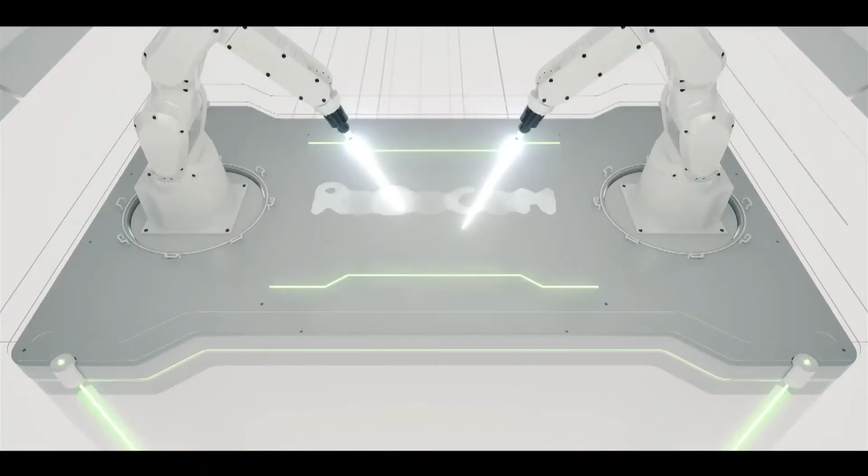Things can amuse and fascinate us all, but it is engineering that changes the world. The engineer has been and is a maker of history.

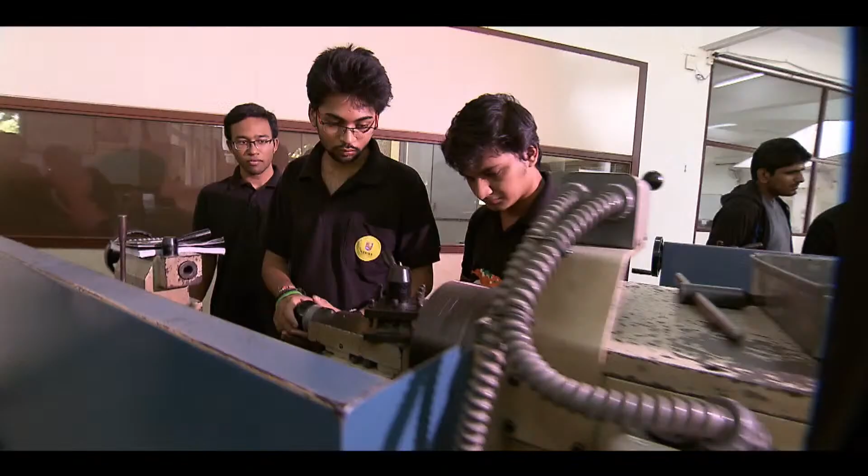One of the most diverse and versatile engineering fields, mechanical engineering is the study of objects and systems in motion. As such, the field touches virtually every aspect of modern life, including robots, that is any automatically operated machine that replaces human effort.

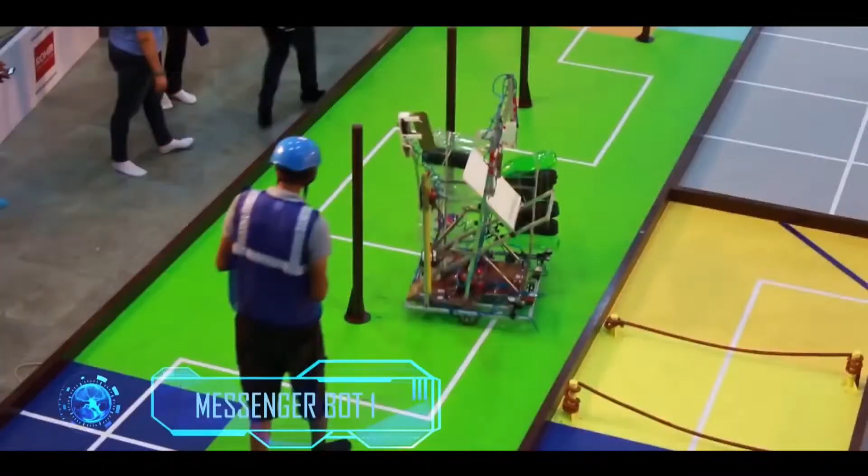Every robot that has been a part of Robocon since 2002 till date, or otherwise, is a programmable mechanical device that can perform tasks and interact with its environment.

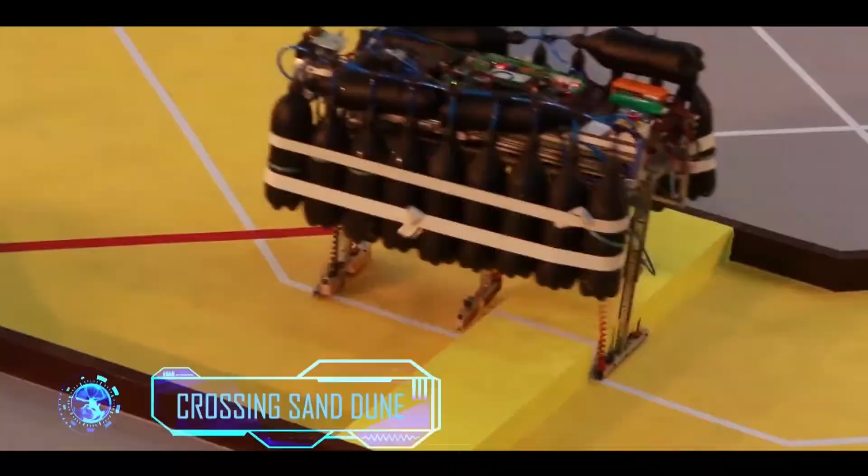This year we have planned a special program for Indian participants to encourage new graduates and students to participate in this robotics challenge, where we have done several things. We started with a curtain raiser program, then we have several interaction programs with participants across India, and we expect the best goes to the finals.

Many students go there and support the team, not only in the arena, but for their fabrication and design. Notice that it's a mix of several disciplines: mechanical engineering, electrical, civil engineering in some cases. Once they see in the hostel the students gathering together and making, students from sciences and mathematics also joined the teams which were playing.

And later on they went on to set up their own startups. So there's a lot of enthusiasm about Robocon, and I am sure it will persist and continue to grow.

DD Robocon is back with a bang. It is a combo of enthusiasm, excitement and the challenge of completing a robotic task with the timer on. The theme of this friendly competition changes every year, keeping intact the concept of creation.

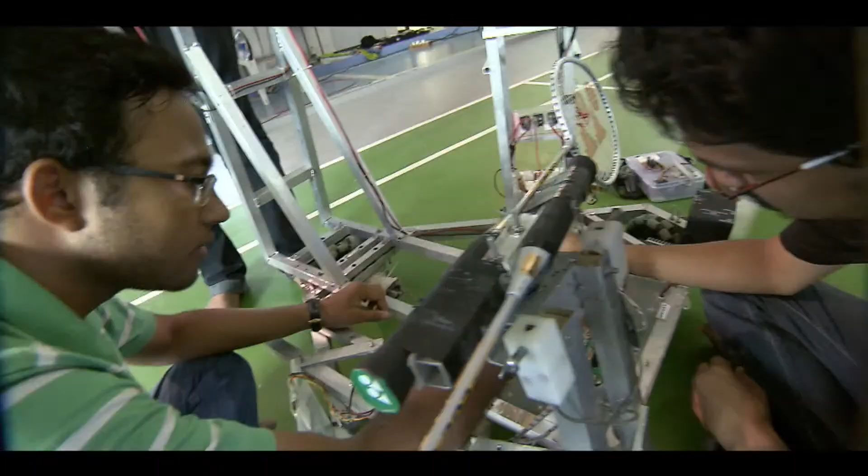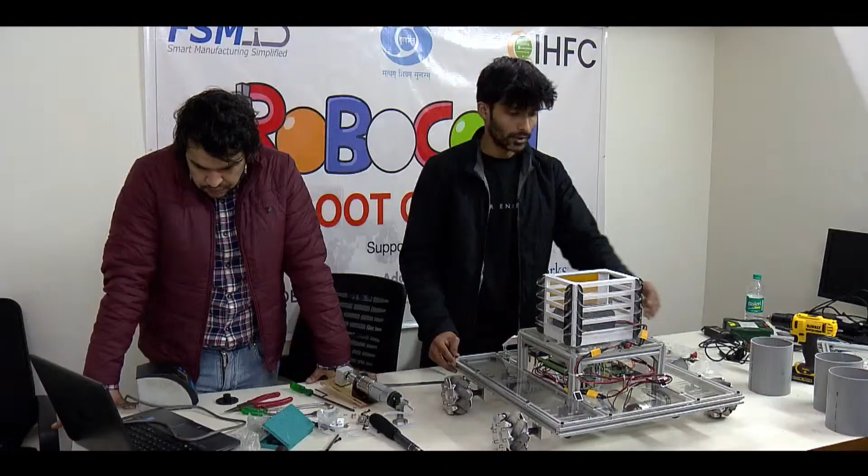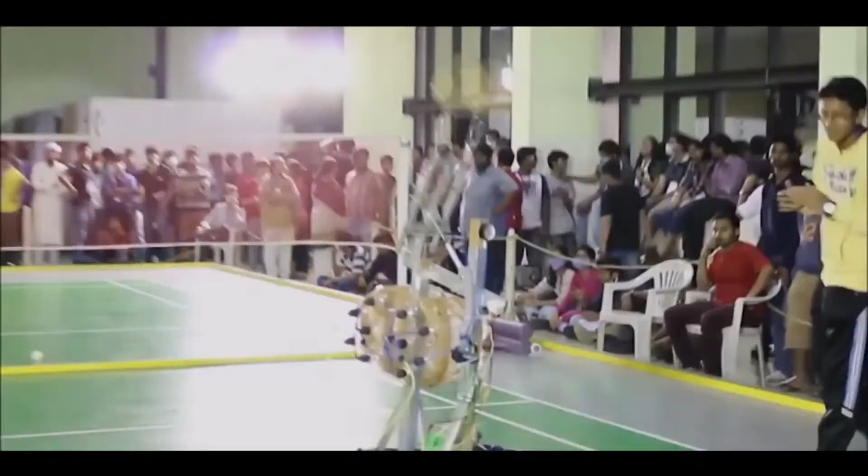Robot making is an interesting task for robotic enthusiasts. Interestingly, the robots are designed keeping in mind a set of steps which make way to build the structure with almost similar components. Robocon is conducted for enthusiasts of the field of robotics, more broadly mechatronics.

As students, we design our robots. We can broadly classify our robot design components into 4 parts. First is perception: that's what the robot sees and how it perceives the environment. Second is control: what the robot needs to do for the task it has been allotted.

Third is prototype: how do we design the system to meet our goals? Which is the design that suits us better? Is one mechanism better over the others? This involves prototyping and understanding how to design a system, and then finally implementing, actually having the system on hardware.

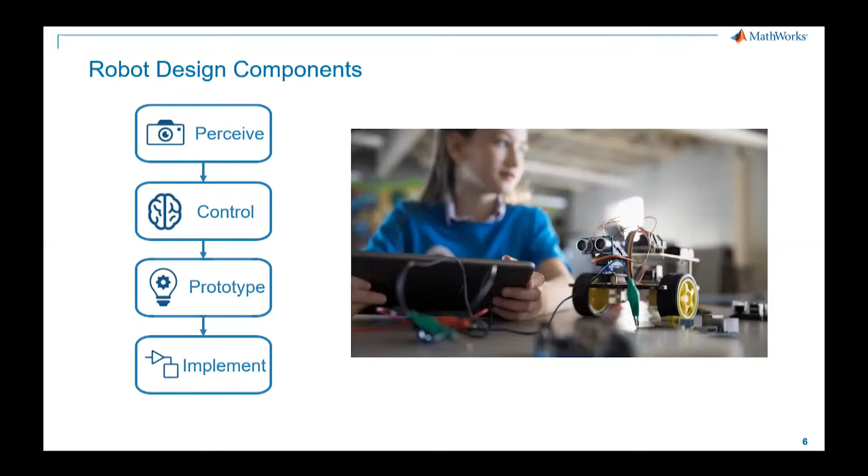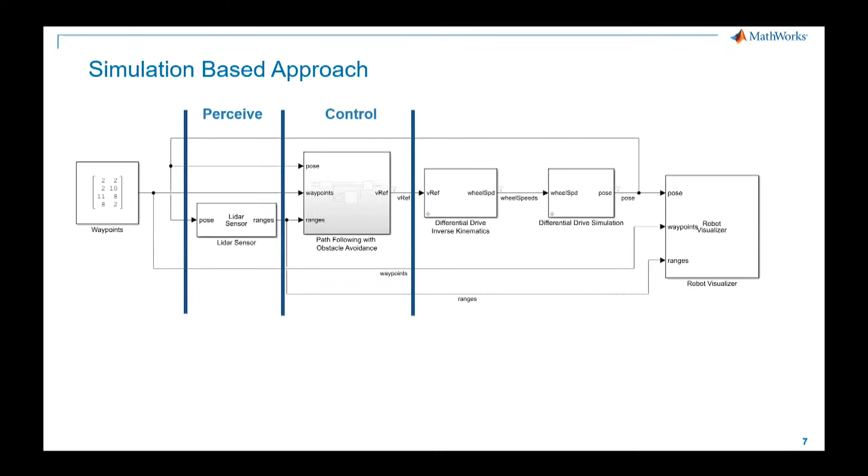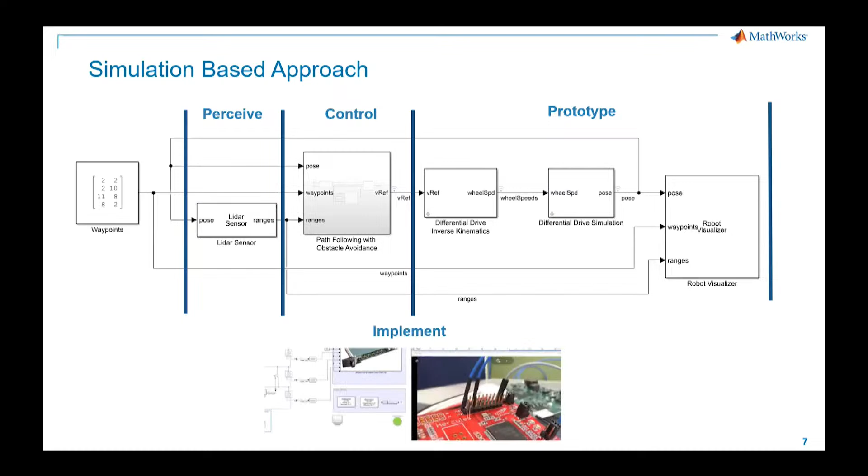You see it running in real time on a system, and we can tackle these 4 components using a simulation based approach. So let's say this is a model of a system: you can have perception, you can have control, you can have the prototyping on how your system would look like, and eventually actually go on to the hardware or have a system set up.

We are IHFC, the I-Hub Foundation for Cobotics. This is what we stand for, and we are a technology innovation hub at IIT Delhi. We have been set up by the Ministry of Science and Technology, so while you are still a part of your graduation in your respective colleges...

As the name suggests, we have been set up by the Ministry of Science and Technology, Government of India, to see that collaborative robotics as a technology reaches greater heights in the country. Collaborative robotics is the interaction between humans and machines. Robocon is a dream for engineering college students to win for the country and their colleges, and we feel that amongst those students lies the potential we are looking for, because participation from enthusiasts like you is very, very critical.

We are working on various technologies like mobile robots, drones, etc. And we would look forward to some of you joining whenever your passion, your dream, your willingness to work towards this objective of ours is also there.

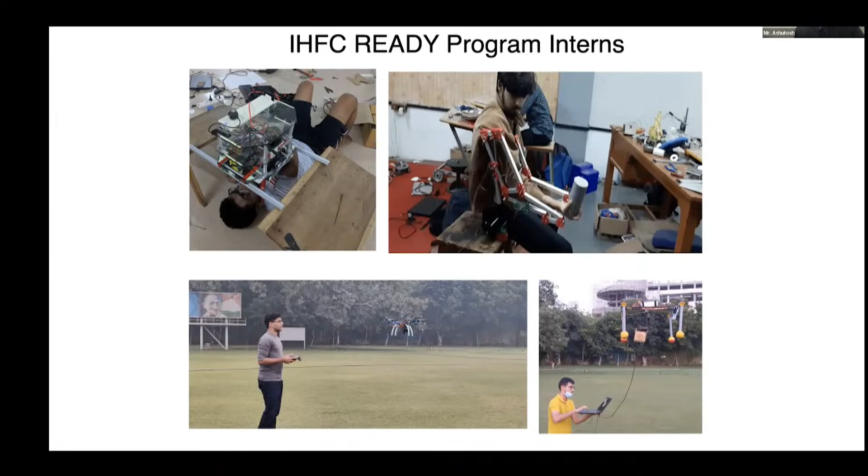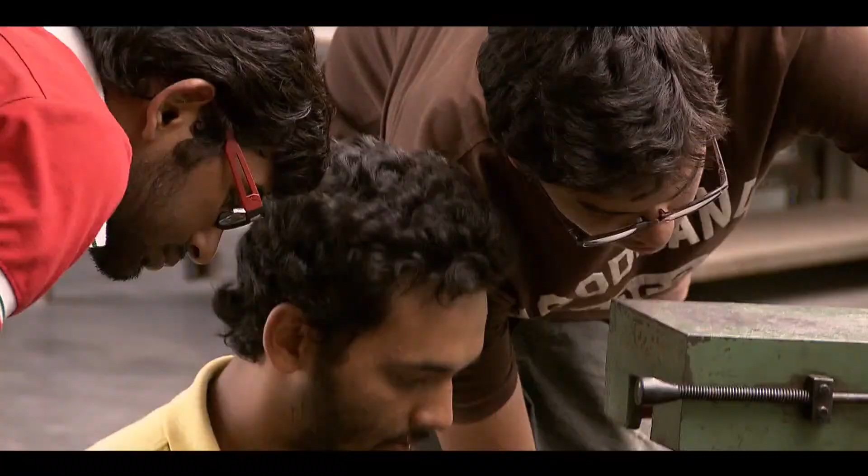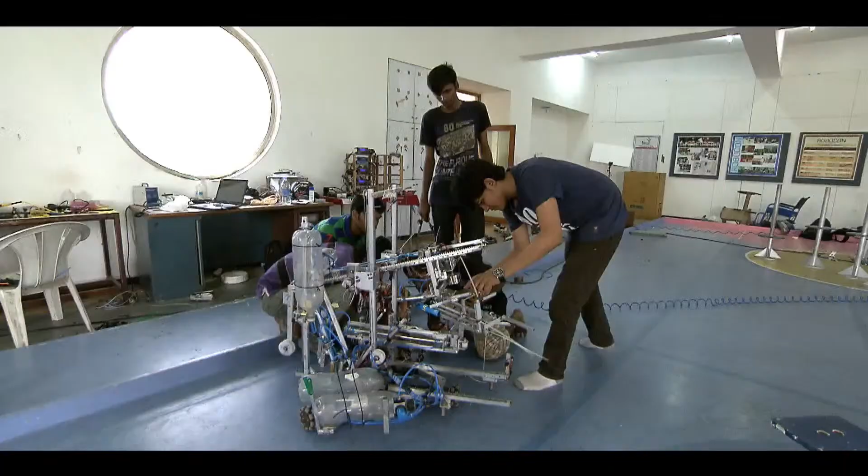Teams from engineering and technological degree and diploma colleges are eligible for participation in Robocon. The participants are expected to fabricate their own robots and need to study in detail how to design, build and control the robots. Participating teams organize their team, which includes an instructor, team leader, manual robot operator and an automatic robot operator.

My name is Paras Gupta. I am Senior Technical Assistant in IIT Delhi, Department of Mechanical Engineering. It was my first very good experience regarding this mobile robot. It was generally organized by DD Robocon. It was a very good experience to build this robot. I generally took part in the designing and the whole assembly work for this mobile robot.

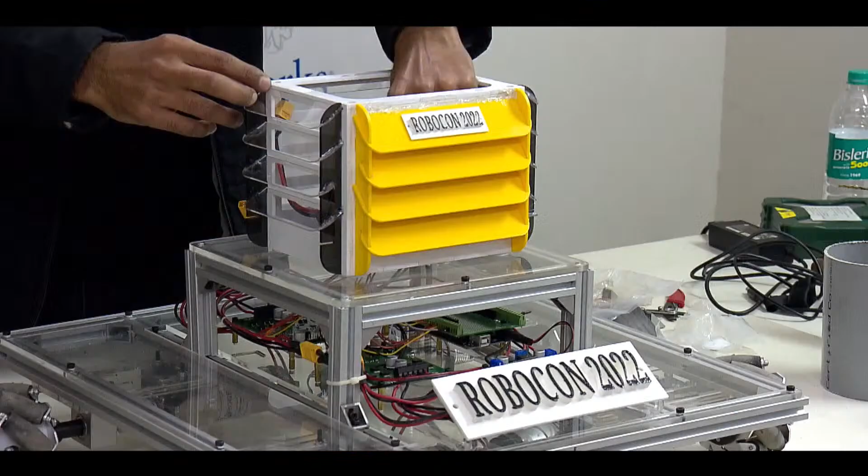Myself, Pankaj Sansanwal, I am working in IIT Delhi as a Senior Technical Assistant in the Department of Mechanical Engineering. Overall, my experience is very good. I just want to thank Professor Saha and Professor Jha for giving me the opportunity to work on this. I'm taking care of the design and assembly of this, and I'm very much excited to participate in August 2022 in Robocon.

The robots are designed keeping in mind a set of steps which make way to build a structure with almost similar components. These basically define the mechanical structure of a robot. No doubt, it is difficult to make robots that work well and in coordination, so a huge investment of mind, mechanism and effort is needed in building the robot.

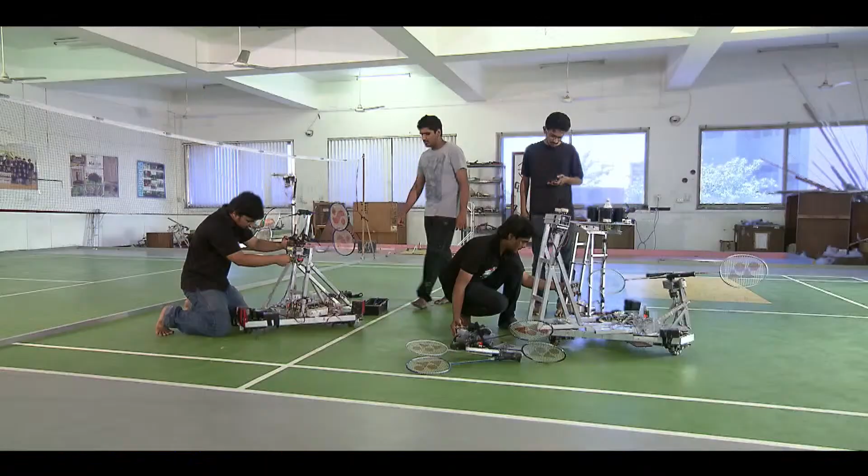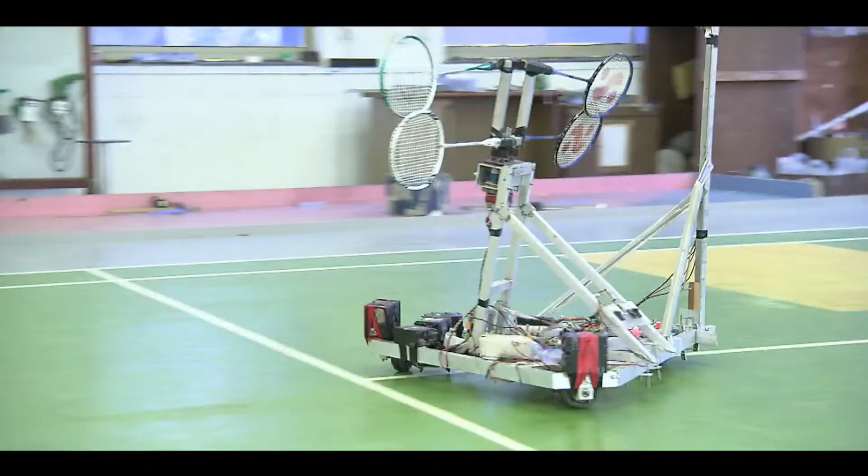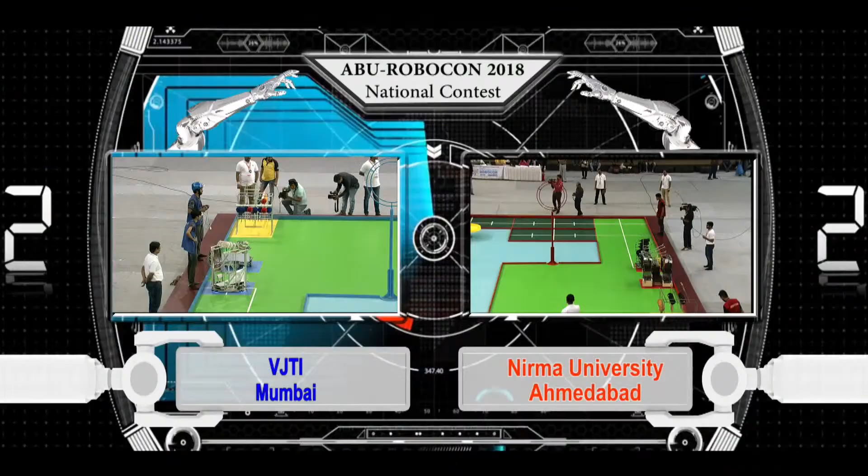It is difficult to make robots that work well and in coordination. The most important aspect is that the information fed into robots, manually or by machine, must be processed well in real time. Especially during the Robocon event, where everything is live, offline or online, participants have to make sure that if they cannot react quickly enough and make sense of what they see, they either have to move very slowly or keep stopping on the way to victory to think and act.

We are happy that the Institute is partnering with Doordarshan in organizing DD National Robocon 2022 and also ABU Robocon 2022. We have been organizing DD Robocon at the national level for the past 20 years, and this year is very special to us. The ABU, Asia-Pacific Broadcasting Union International Robocon competition, is being held in the city of New Delhi, and IIT Delhi and Doordarshan are jointly organizing this event.

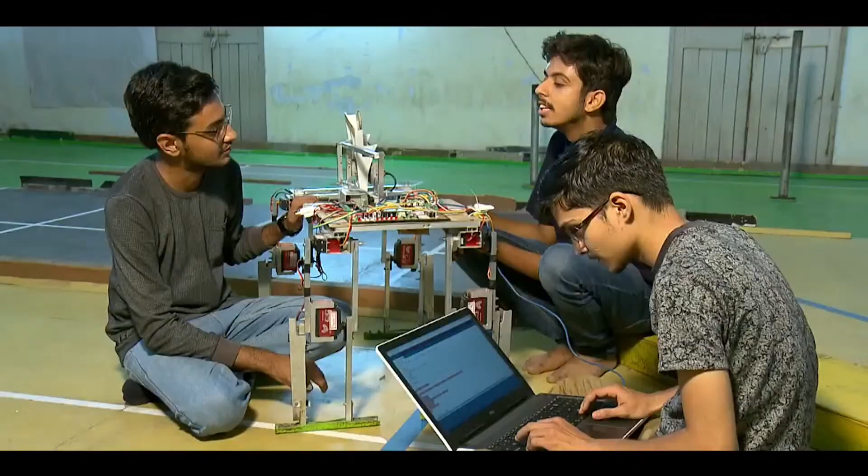There is a lot of enthusiasm among young people to get into this field of robotics. One reason is the low-cost hardware and open source hardware and software available today, so the entry level barrier to this field has been reduced. There is a lot of enthusiasm among these young people, but one task is how to channelize their enthusiasm.

In that context, our boot camp which we organized under ABU Robocon helped a lot in structuring their enthusiasm and in arriving at designing and fabricating a particular mobile robot for a particular task. This structured boot camp helped students get hands-on experience in designing and working with the hardware that goes into making a mobile robot. We are very happy that there is a lot of good participation from young people in this boot camp, and I wish all the participating teams good luck for DD Robocon 2022 and also ABU Robocon.

Success is where preparation meets opportunity. Similarly, golden opportunities like DD Robocon challenge students to bring out the best in them and push them to do better. Typical steps involved in designing robots for Robocon and similar competitions are like any new product designed by a company.

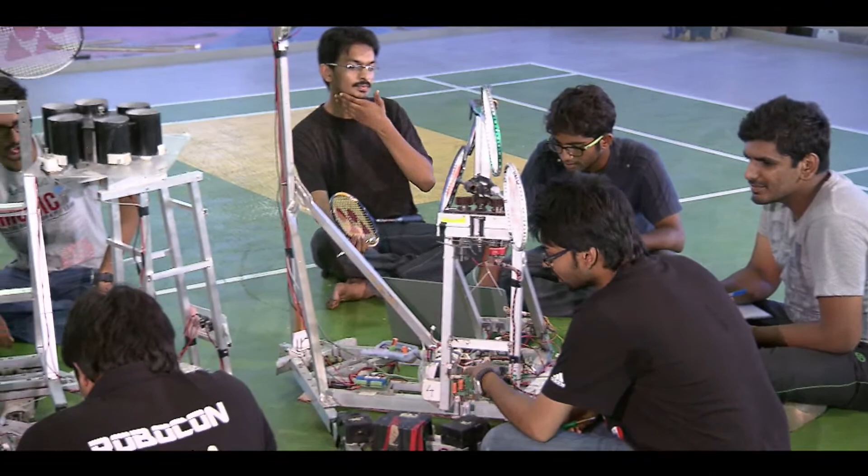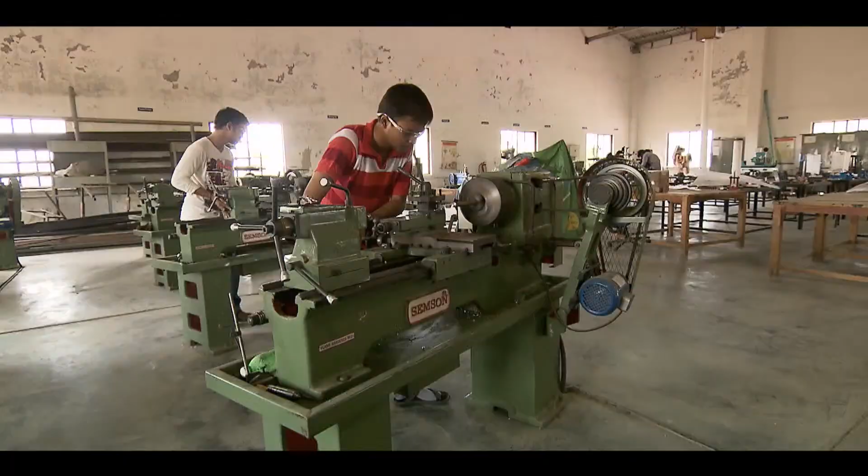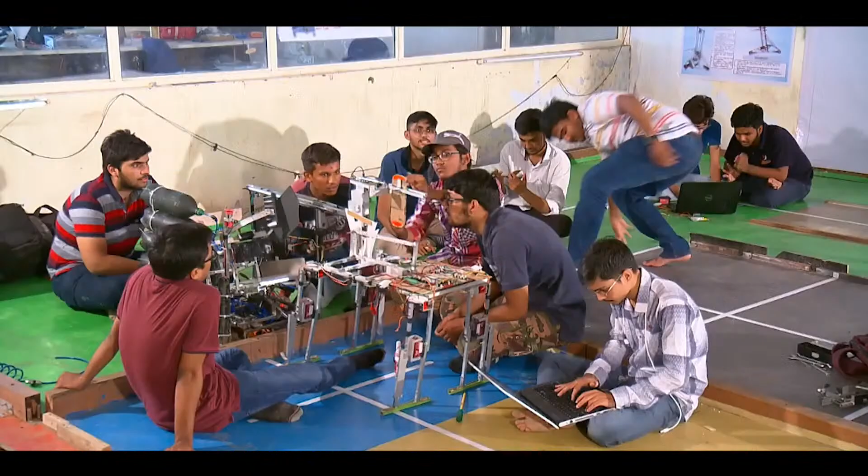The road to success and greatness is always paved with consistent hard work. The participants have to outwork their competitors through both hard work and smart work. They are trained to counter the real world and solve real issues with mechanical strength and brilliant caliber. The activities in Robocon competitions simulate the real world industrial product development cycle, making students industry ready.

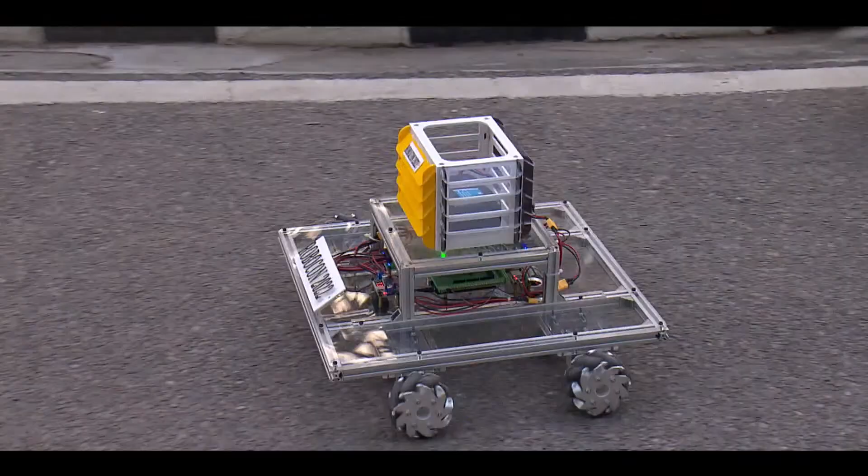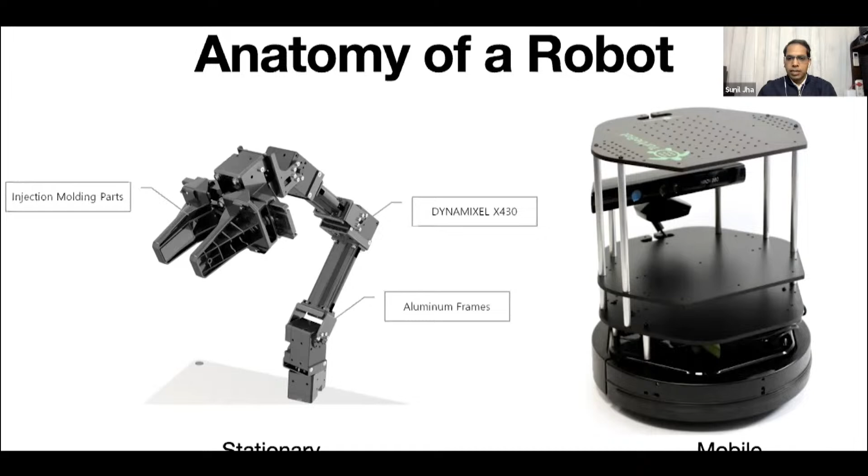Robots are of various types, so let's quickly understand the anatomy of a robot. There are stationary robots fixed with multiple degrees of freedom, able to perform certain activities, and there are mobile robots. The robots used in Robocon games are a mix of both, integrating grippers or mechanisms onto a mobile platform to perform tasks required by the game. Broadly, there is a frame, motors or actuators, sensors, and certain body parts that are manufactured.

Humans and robots have very similar elements to them. They both can have arms and legs, run, and lift weights. It's no secret that artificial intelligence, robotics, and increasing automation is all around us. The future of this technology is exciting. When humans work alongside technology, it can enhance productivity, efficiency, and accuracy.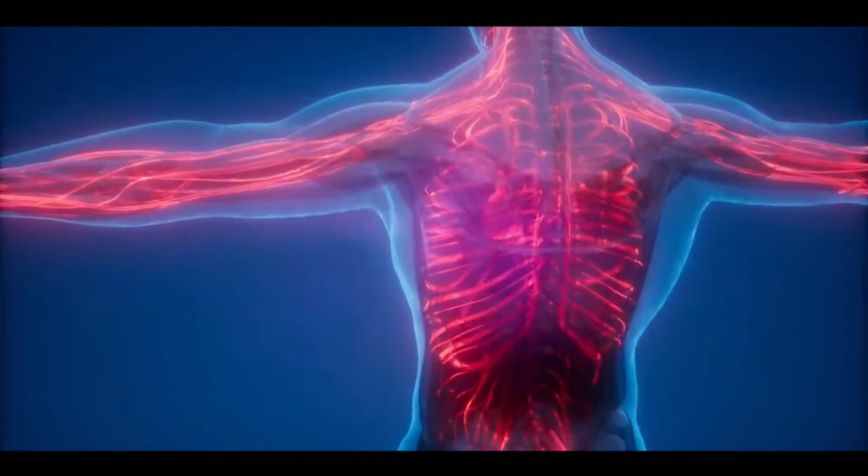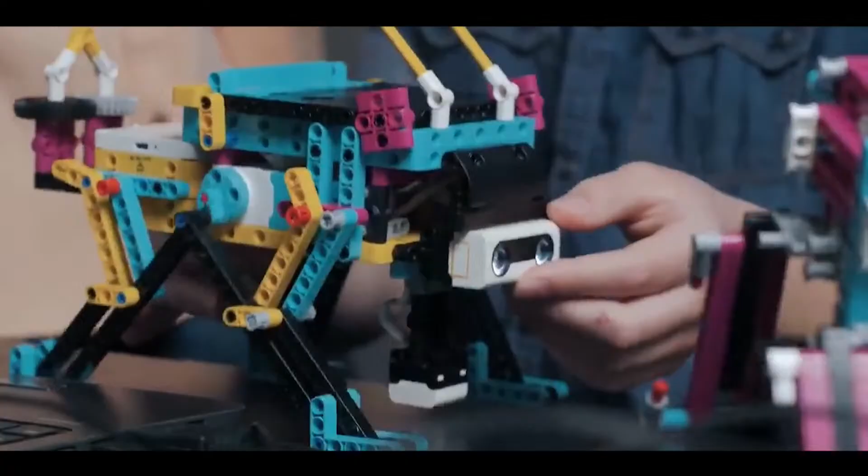The human body is a complex, highly organized structure made up of unique cells that work together to accomplish specific functions necessary for sustaining life, whereas a robot is a machine that functions automatically and can adapt to changes in its environment. Robots are designed more for function than appearance.

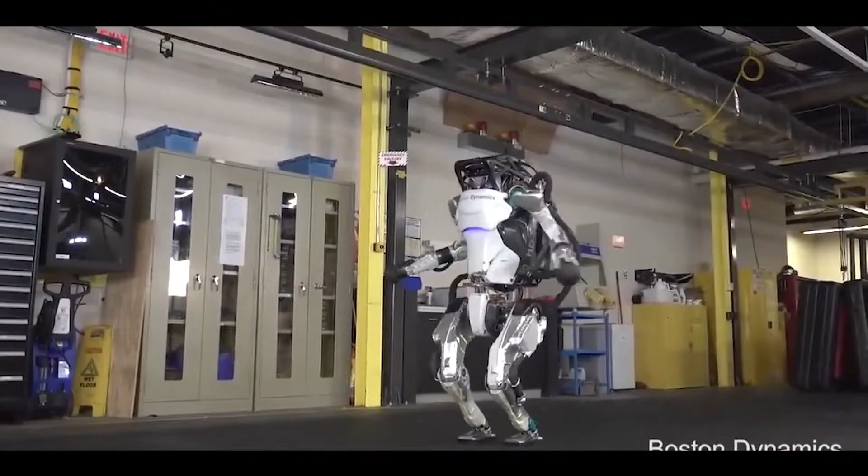Still, the physical features of a robot attract attention. A typical robot has a set of movable physical structure, manipulators, locomotion system, control system or the computer brain, sensor system, drivetrain, and a power supply.

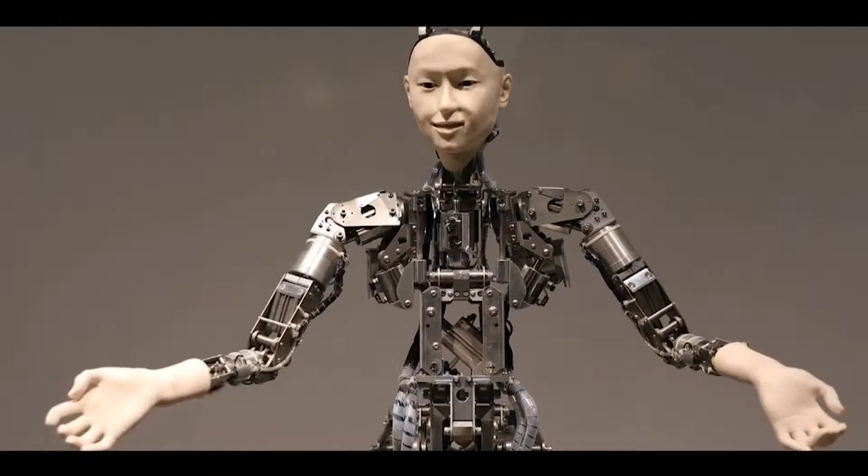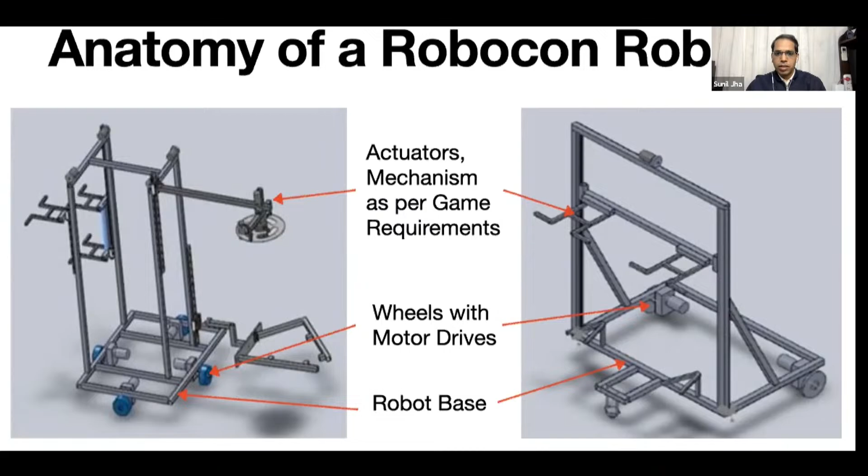Physical structure: the physical components of most robots have some similarities with the structure of the human body. Most people are comfortable with such human-sized and shaped robots. Sometimes people refer to the different components that make up the robot with terms such as waist, shoulder, arm, elbow, wrist, etc. These parts of a robot are used for movement and positioning.

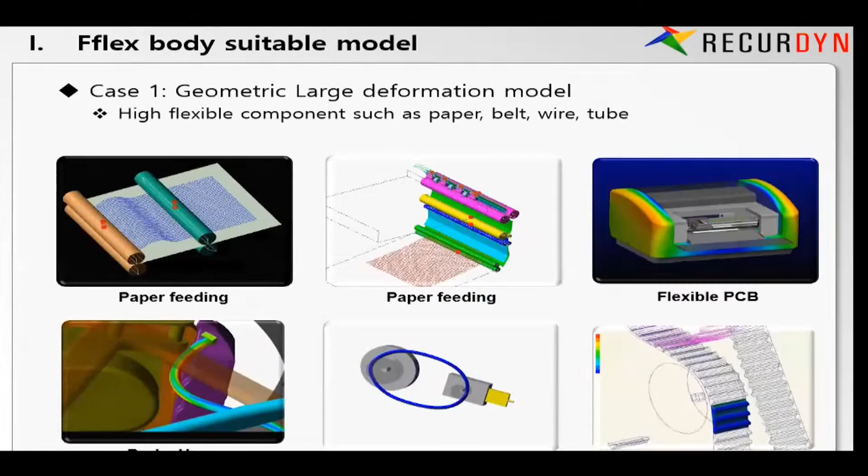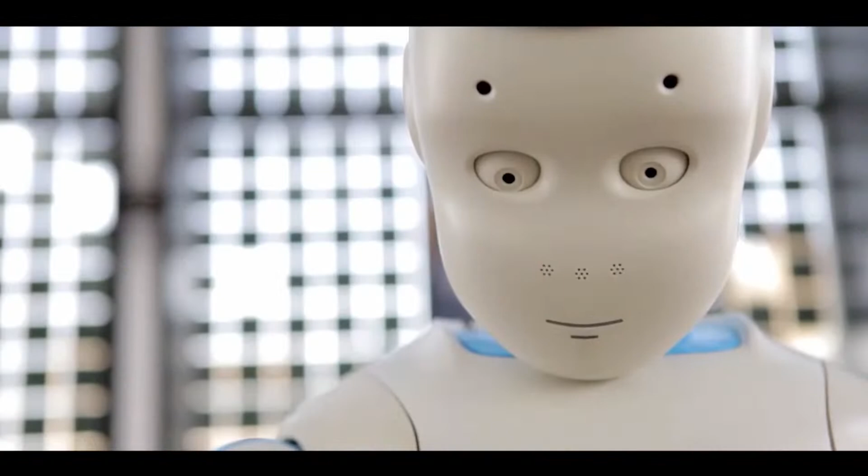The physical structure can be of any shape and size. Essentially, the body or frame provides the structure of the robot. Robots are distinct from ordinary computers in their physical nature. Normal computers don't have physical bodies attached to them.

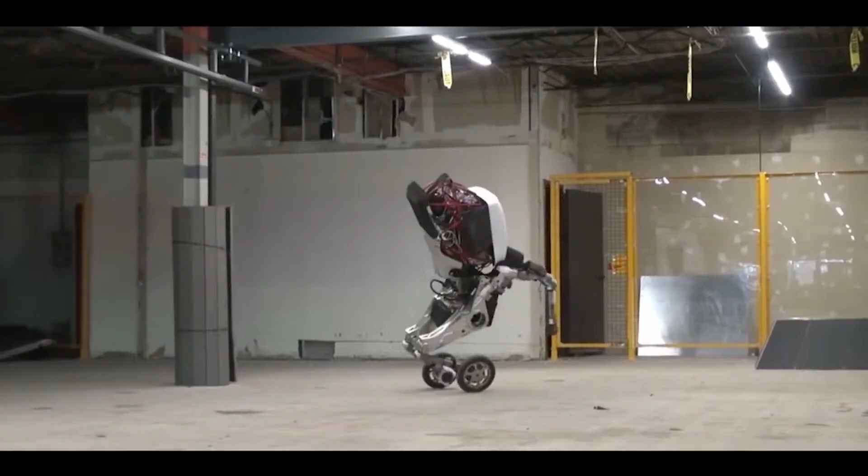A robot needs a power source to drive. The parts of a robot are connected with joints, but they can't move on their own. They need actuators which are powered by electricity, pneumatics (compressed air), or hydraulics (oil-like fluid). With actuated joints, the robot can rotate and move right, left, forward, backward, climb up or down, etc. This is accomplished with the help of a device that converts electrical energy into mechanical energy.

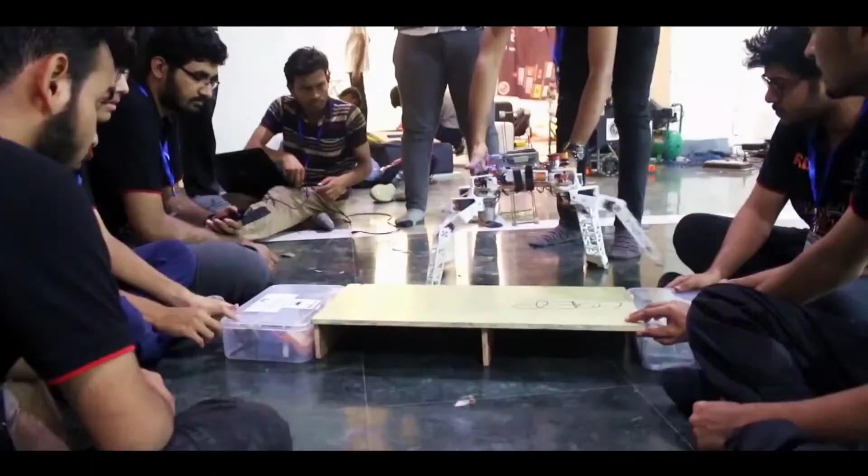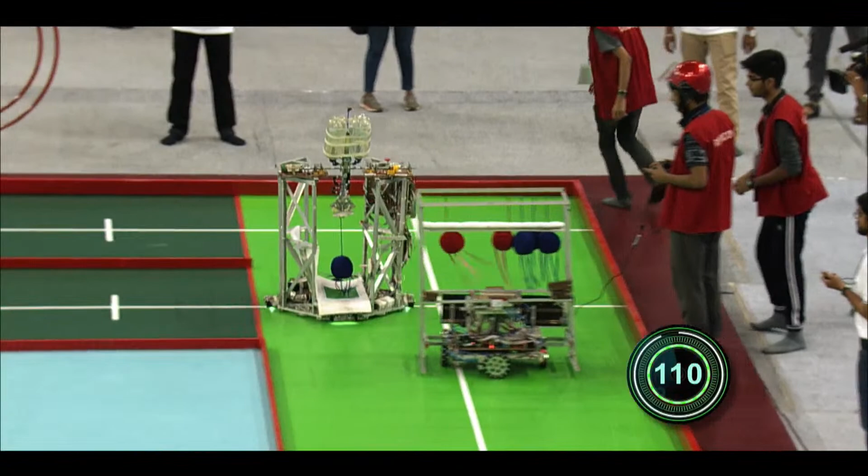This will help the robots in Robocon play the Lagori game, interact with the environment and the world around them. After manipulating and influencing the movements of robots comes the controller that coordinates and controls all aspects of the robot.

The button is here, it will work like this. I will press the forward condition, so it will move forward. If I press this, this is the back condition.

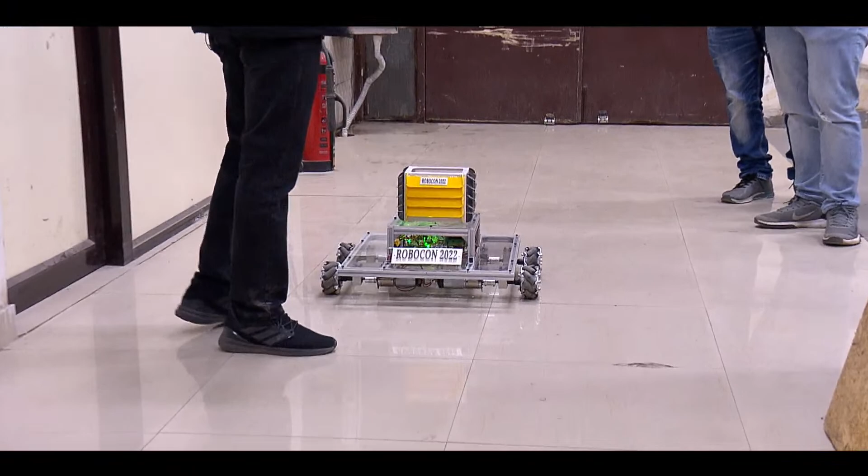So we are talking about the coordinate system. This is the plus X direction, so I will move it here. It will go in the plus X direction, it will go in the minus X direction, as we already seen the Y direction also.

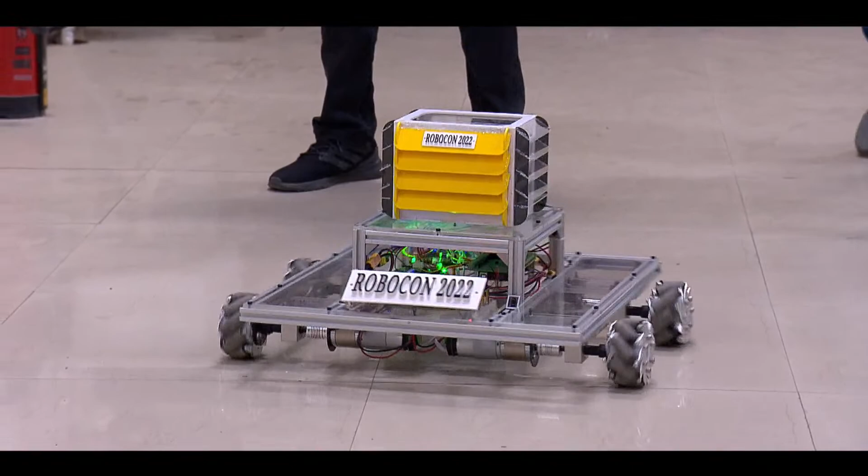Now we are going to rotate this robot. This is the rotation, clockwise rotation. This is clockwise direction, this is anti-clockwise.

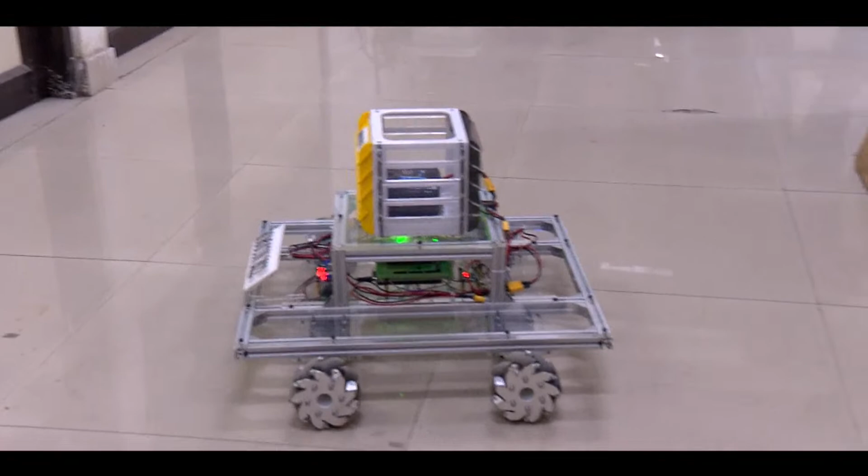So it has a dual option also, it will go diagonally also, this robot. Okay, so how it works is like this through this remote control system.

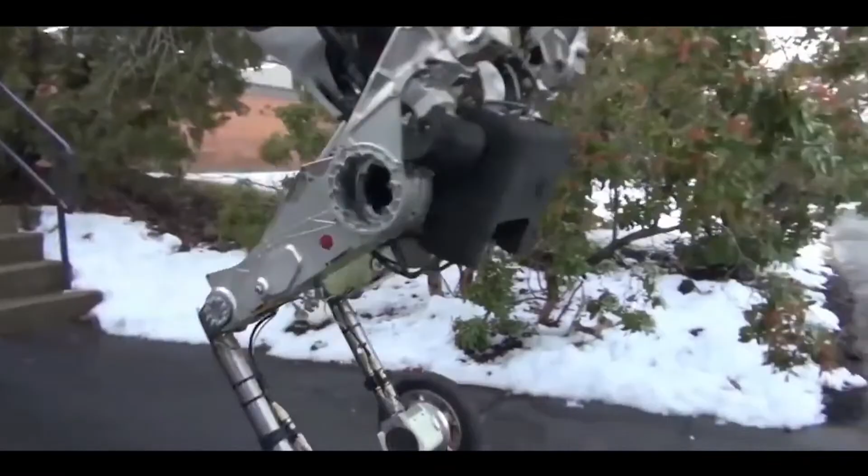As a body can move its parts with the help of joints, but nothing is possible unless we have a brain to control everything. Therefore, a control system is very crucial.

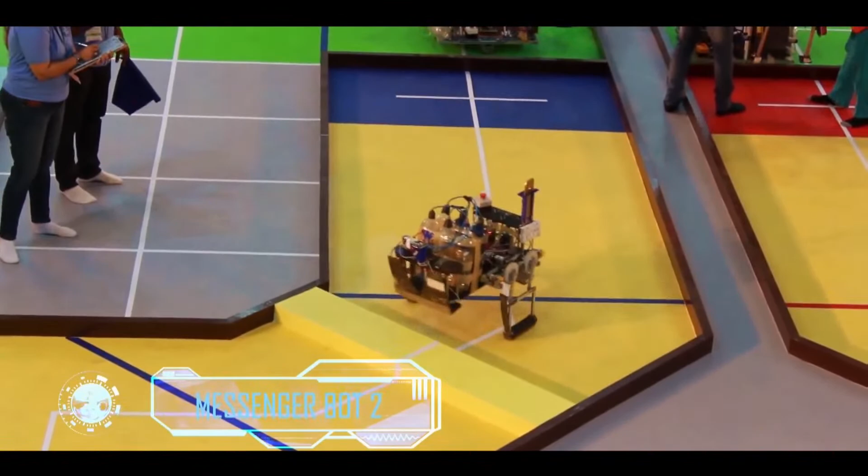It is a microcomputer with a central unit, memory, power and interfaces to access the external elements. It coordinates and controls all aspects of the robot. It regulates each of the manipulator's movements, actions, calculations and processing of information. It receives and sends signals to other components via input or output signals and stores programs.

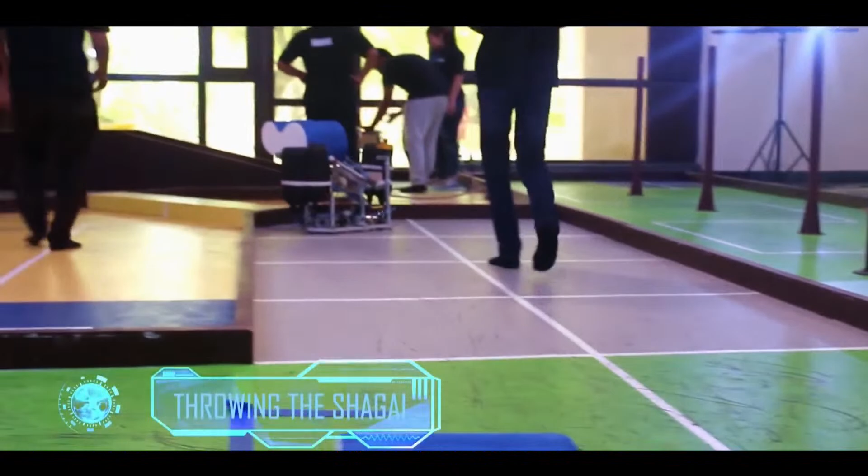Sensors also provide feedback based on the robot's surroundings, which is then sent to the central processing unit, that is the CPU. The CPU filters this information through the robot's programming and makes decisions based on logic. The same can be done with a variety of inputs or human commands.

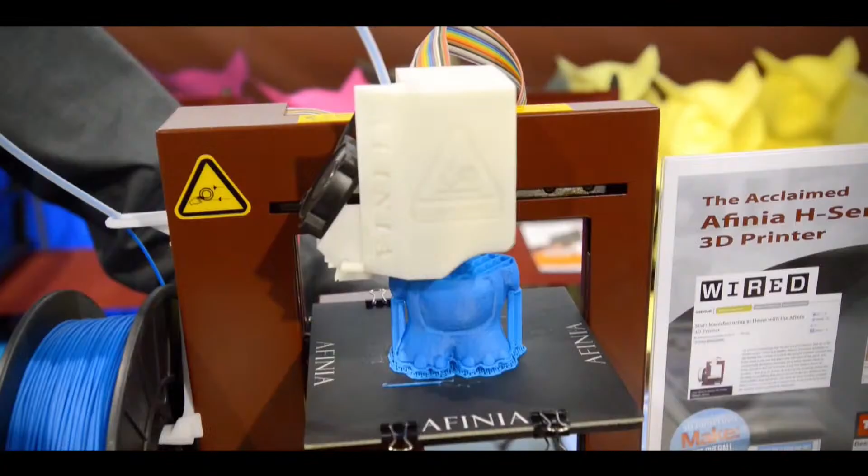It can be of following types. Position controller: it only intervenes in the control of the position of the terminal element. Velocity control: it regulates speed. Dynamic control: it controls the dynamic properties of the manipulator, motors and associated elements. Adaptive control helps the manipulator change and adapt to different positions.

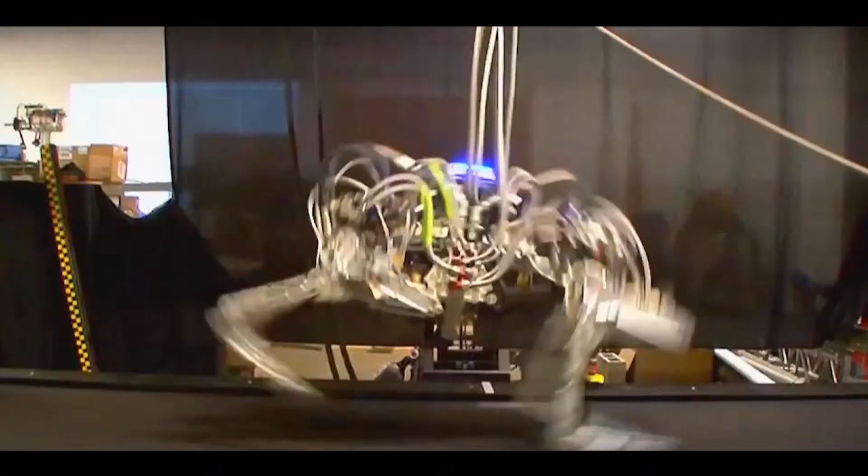Robots are machines that can sense, plan and act. Sensor system: this is just like our sensory organs. The sensors allow the robots to detect the conditions of the environment and can behave according to its programming, respond to changes in conditions, obstacles, etc.

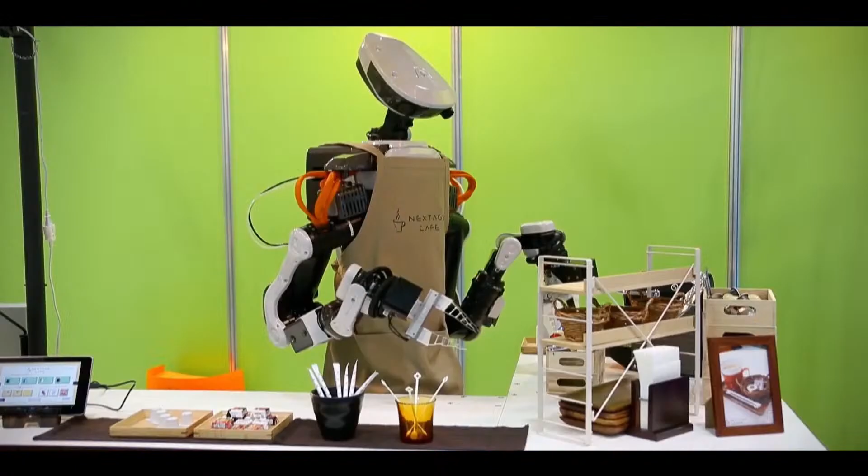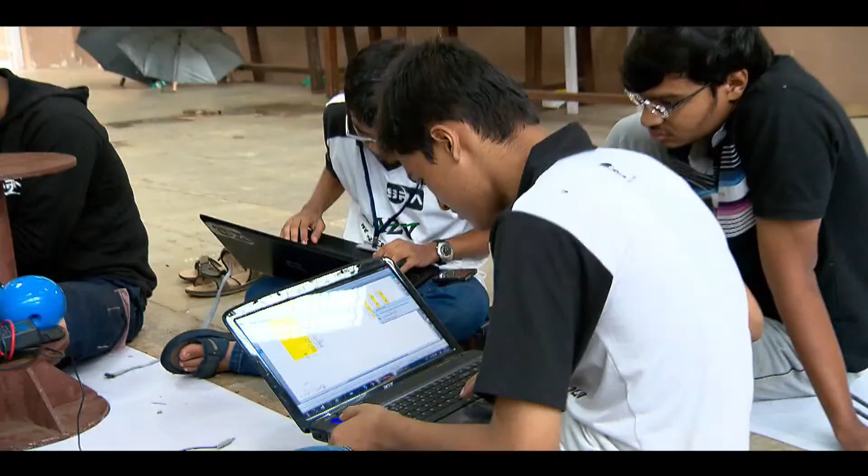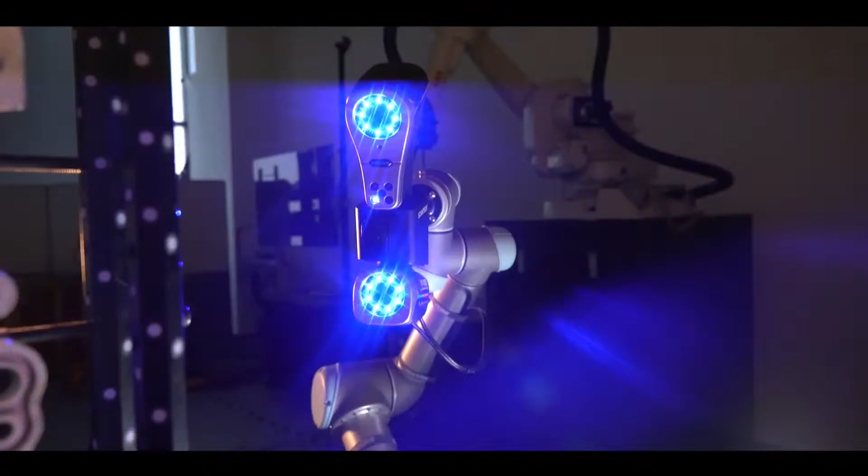Sensors provide information about environment or internal components like motor or cylinder position, LED status, etc. This information is used to calculate the appropriate command to be sent to the actuators. There is a wide variety of sensors. Examples include ultrasonic, infrared or laser rangefinders. These are the basis of laser scanners, enabling the robot's central processing unit to become aware of its environment.

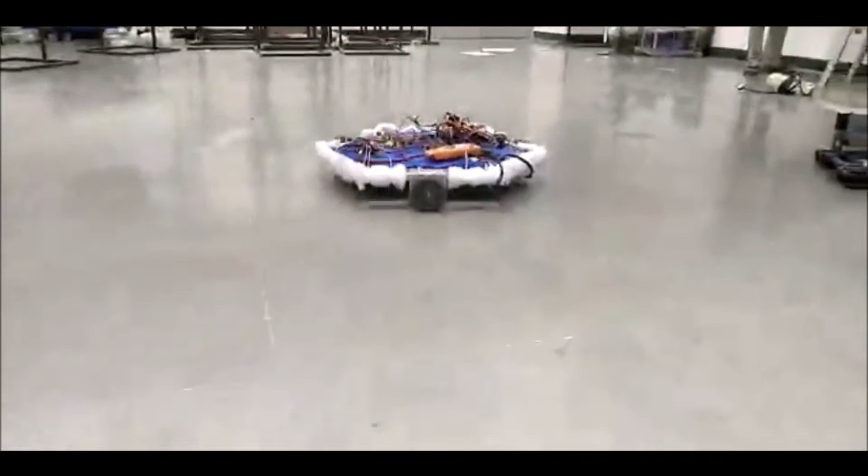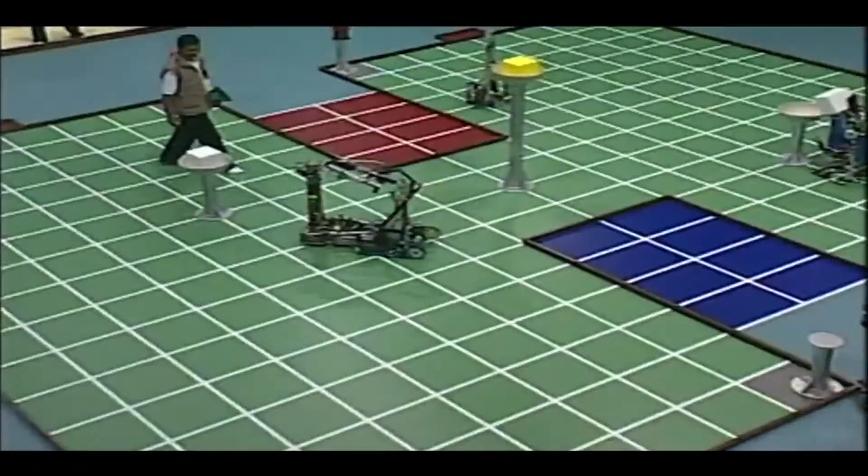For robots, mobility and the need to perform tasks from place to place, a drivetrain is required. Although some robots are able to perform their tasks from one location, it is often a requirement of robots that they are able to move from one location to another. For this task, they require a drivetrain.

Drivetrains consist of powered methods of mobility. Humanoid-style robots use legs, while most other robots will use some sort of wheeled solution for movement.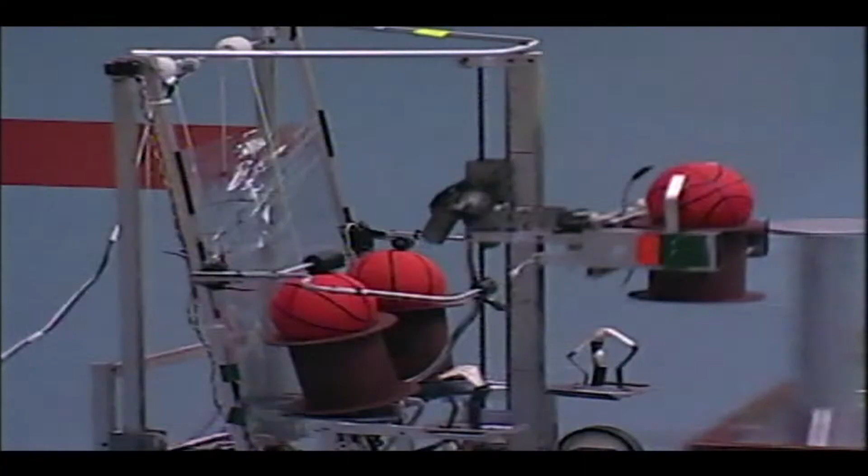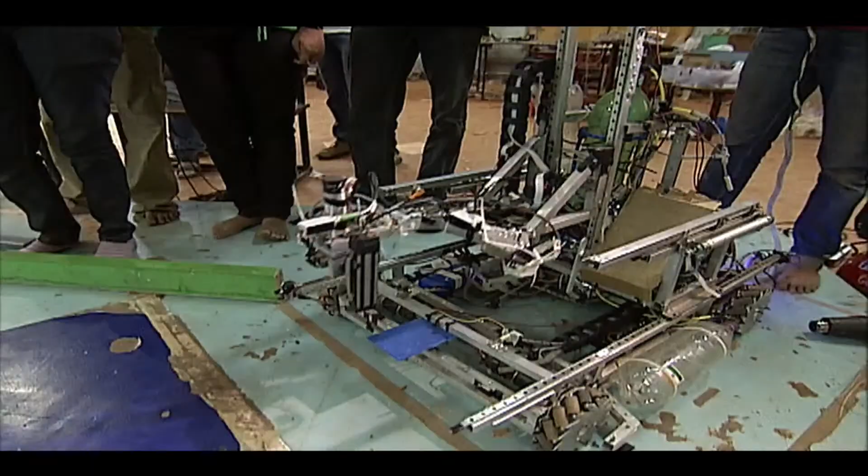Lastly, the most important aspect of robotics is power supply, almost like a fuel and fodder for the former. All robots need a power supply system to work. The power supply acts as food to the robot. If you don't feed the robot, there is no way it can work.

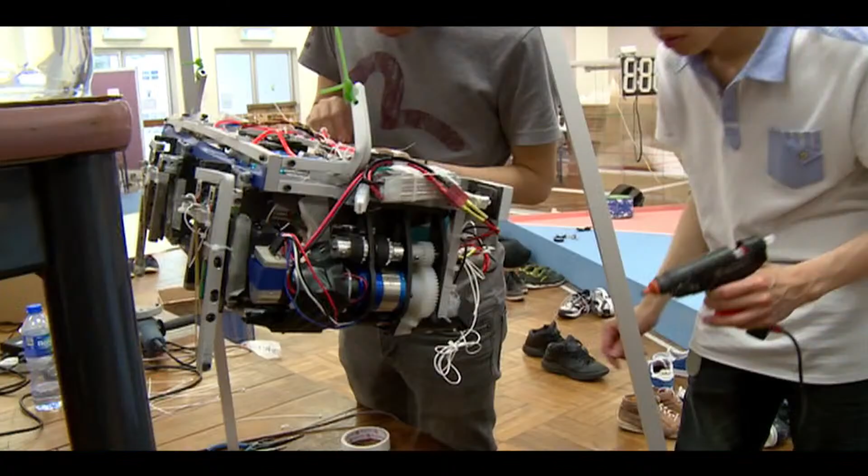Therefore, the robot needs a power supply to work, and most robots use DC supply, although solar power is becoming a focus for some types of robots.